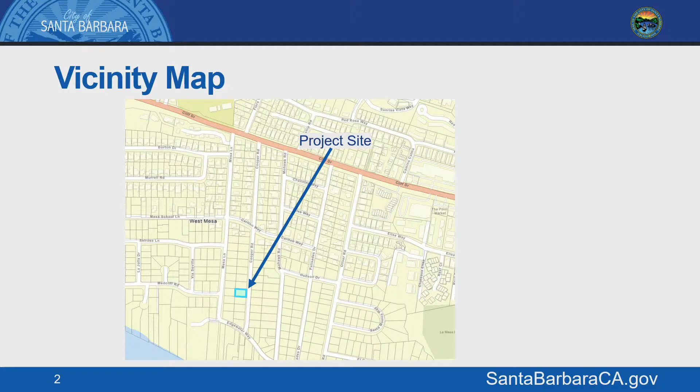Here's a site plan showing the areas of the proposed addition. This area on the back left is behind the house and will be an addition; it doesn't encroach into the setbacks. Then this addition here on the right is a small bedroom addition that will encroach approximately 10 inches into the 6-foot interior setback.

You can see that it's in line with the existing non-conforming structure just above it. Then this area towards the bottom of the residence shows that the existing residence is non-conforming to the front setback, so there's no proposed change to the footprint there. It's actually changes to the front facade, raising the roof line and changing the windows in the front setback, which trigger a modification.

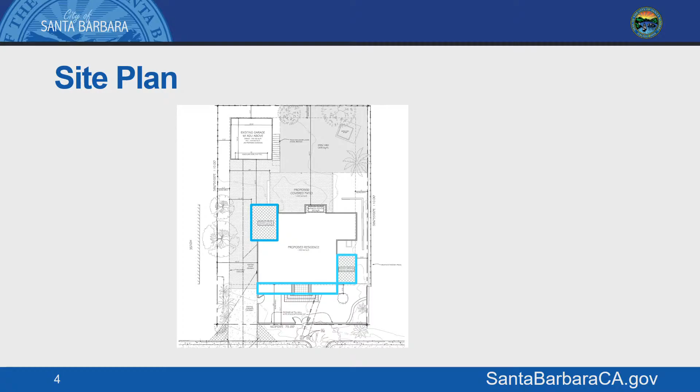This is a closer view of the proposed additions. Here you can see the small bedroom addition, and it makes more sense for the applicant to have it in line with the existing structure. Then here's the area that includes changes to the existing legal nonconforming structure within the front setback. As I said, it's not increasing the footprint, it's just basically increasing the volume there.

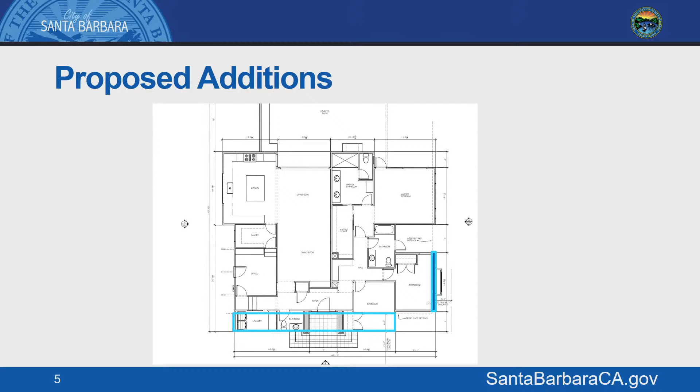And that concludes, oh, let's see.

So for the modifications, staff believes that the front setback modification and the interior setback modification are necessary to secure appropriate improvements on the site and won't have any negative impact on the surrounding neighborhood.

The project was exempt from design review, so it didn't require going to SFDB, as it's only one-story minor additions. It will also receive a coastal exemption and is exempt from further coastal review.

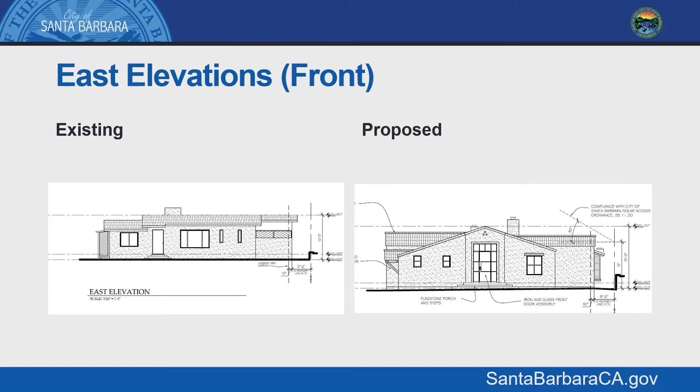For the CEQA guidelines, the project qualifies for an exemption from further environmental review under section 15301, which allows for small additions to existing facilities. That concludes staff's presentation.

I do have the applicant, Matt Hepner, here, and he has a couple of slides he wanted to show you, to demonstrate how he took into consideration the neighboring property.

That's the plans. That's nice. Okay, yeah, these are all the applicant's. Okay, yeah, here we go.

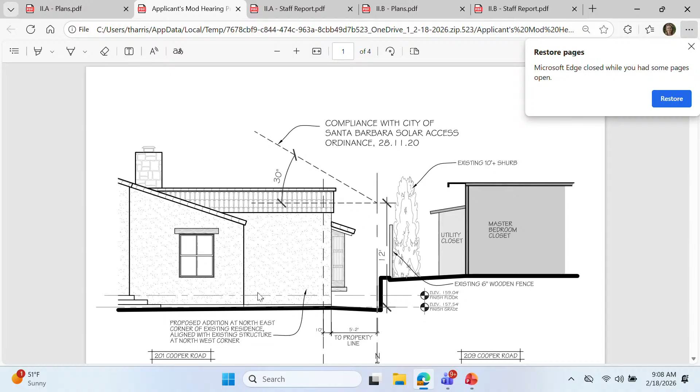There are also some images I have that show the area we're proposing this addition is already developed. This is actually even more non-conforming because it extends to the front facade of the residence, so that is also almost 5 feet within the front yard setback.

Our proposed addition would pull back that portion that's within the front yard setback and instead aim to just provide a small bedroom here. We're requesting the modification for just a modest additional amount of space in order to achieve a decent-sized bedroom. Part of the proposal is just to provide a modest-scale 3-bedroom, 2-bathroom home for a small family, this being one of the children's bedrooms.

Typically when I'm laying these things out, I try to stay at about 10 feet. This one, even with the addition, would still only be 9.5 feet wide, again lining up with the addition in the rear, continuing that line.

Other than that, I think Kelly's pretty much covered the bulk of the proposal, what we're asking for, and what our intentions are.

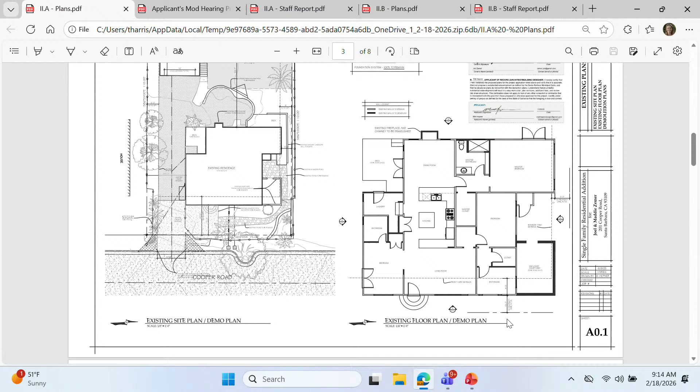And so that's where we've arrived with this one main gable that will do that, and then having smaller perpendicular gables that cover what in this case is an existing bedroom, in this case the kitchen addition, and in this case this second bedroom. So had we included this area here, it would have led to a very difficult roof solution.

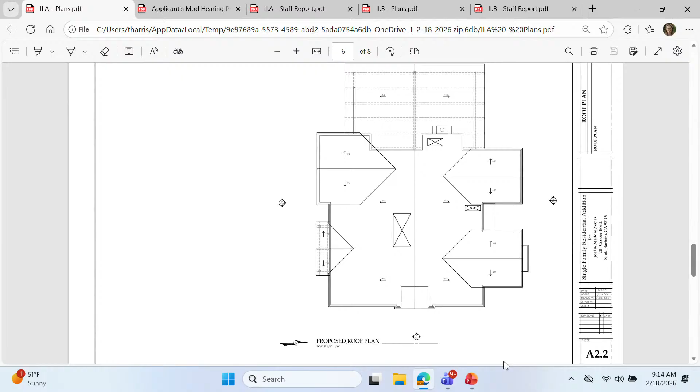That's really helpful, thank you for describing that. It makes a lot of sense when you're looking at the roof plan, why that separation of space is there. I don't have any other questions for the item. It's a 355 square foot addition with a porch and a patio.

I do think that the request for the front setback modification and the interior setback modification is appropriate, especially given the non-conforming structure and where it already exists, and that it's not really changing in the sense of the front setback modification. For the interior setback modification, it's a minor encroachment at 10 inches or less, and so just recognizing that is a reasonable encroachment.

And then I appreciate the overall roof pitch, the use of clay tiles, the need to change the configuration of it for drainage purposes and to better align in that. I can also recognize a desire for a family to want to stay in a home and be able to have a little bit of additional space for family. So fully understand that. So with that, I will go ahead and make the findings that are in the staff report with those comments that I just mentioned.

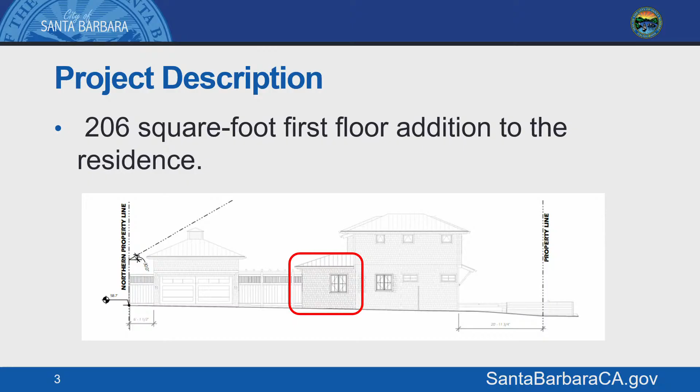The required actions of the staff hearing officer today are an open yard modification to allow the proposed addition to reduce the required open yard below the 1,250 square feet and to permit the allowed open yard encroachments to exceed 20%, as well as a determination that the project is categorically exempt from further environmental review under

15301. So some more about the open yard modification. The existing site currently complies with the open yard requirements by providing 1,250 square feet, and it meets the location standards and the minimum required dimensions of 20 by 20 feet.

As you can see on the site plan, the addition would reduce the open yard to 750 square feet.

Additionally, as a note, if the required open yard is reduced, the existing trellis and arbor would exceed the 20% encroachment limit. This encroachment would be approximately 33%. To comply with the encroachment, it must either be reduced to 150 square feet unless approved by the staff hearing officer.

Consequently, the applicant requests a modification to allow the reduction in the required open yard area and to permit the trellis and arbor as an allowed encroachment.

As you can see on the site plan, the applicant also proposes 500 square feet of usable open space in the front yard. However, this area cannot be counted towards the open yard requirement because it's entirely within the front setback. So I think you can see this on the site plan. The green area is the proposed open yard, and the red area is usable open space but can't be counted towards the open yard.

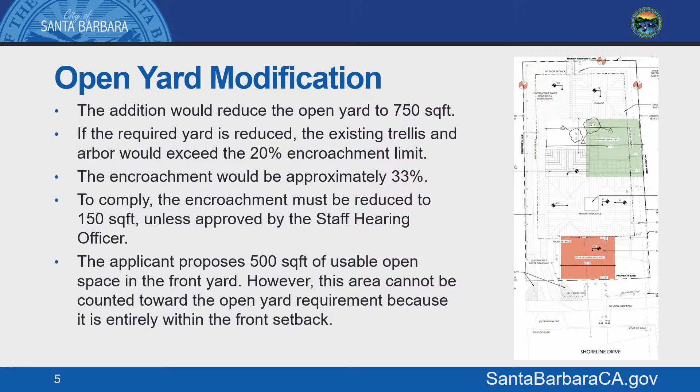Staff support for modifications is based on required findings, unique site constraints, and patterns of development in the area, as well as conforming alternatives.

Open yard areas are intended to promote desirable living conditions, a sense of openness in residential developments, and ensure adequate space for outdoor living and recreation.

Staff does not support the requested modification because a bedroom already exists on the first floor. Additionally, staff finds no significant site constraints that would justify a reduction in the open yard area.

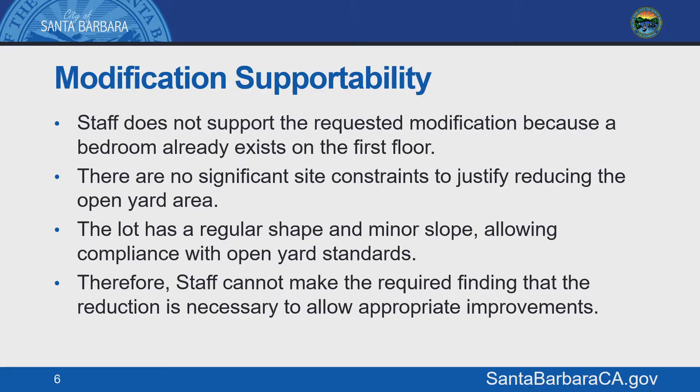The lot has a regular shape and minor slope, which provides adequate opportunity to maintain compliance with the open yard standards. Therefore, staff cannot make the required findings that a reduction in open yard area is necessary to secure an appropriate improvement on the lot.

And here is where you can see the site plan and how the lot is regularly shaped. It's a rectangle. It has a minor slope, and it is not a corner lot, so it's not constrained by 2 front setbacks, which can sometimes be a hardship.

Here is the proposed floor plans, existing and proposed, where you can see outlined in red there is already a bedroom on that first floor. And the proposed first floor just expands it and adds more to the bathroom as well.

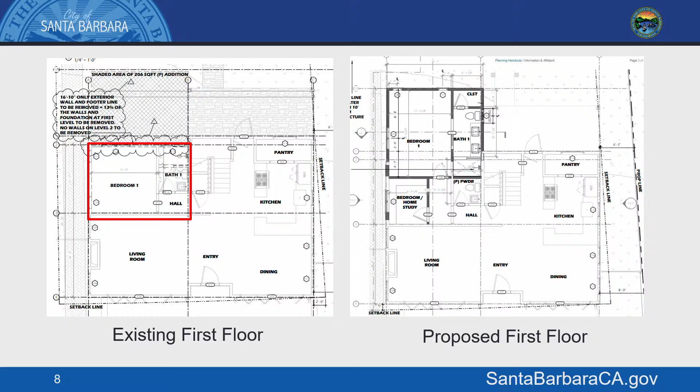So staff recommends that the staff hearing officer deny the project subject to finding B in section 7 of the staff report. And here's that finding on screen. It's kind of a long one, but there it is.

And so we do have the applicant here, Kevin Capone, and they are requesting extra time to present their project since staff is recommending denial, and I'll hand it off to them.

Did you guys want the plans? Oh, no, that's okay. Okay, thank you very much. Yes, I'll pass it over to the applicant.

Hi, Tess. How are you? It's been a while. Nice to see you.

There we go. Okay, so we have a unique situation, so totally appreciate staff taking the time, and you've been great to work with, Genesis, so thank you. So we have a unique situation here.

We have my client who lives here, and there was a letter that was submitted, which is on public record. She has a medical condition, early onset Alzheimer's, and so what we're trying to do is allow these people to age in place in their home. There's a big push within the state of California currently to allow for aging in place.

It's actually part of the new code amendment that we're having to address, what it means to try and keep older people in their homes. And with the cost of elderly care currently, especially within Santa Barbara County, I think these are really relevant things to consider.